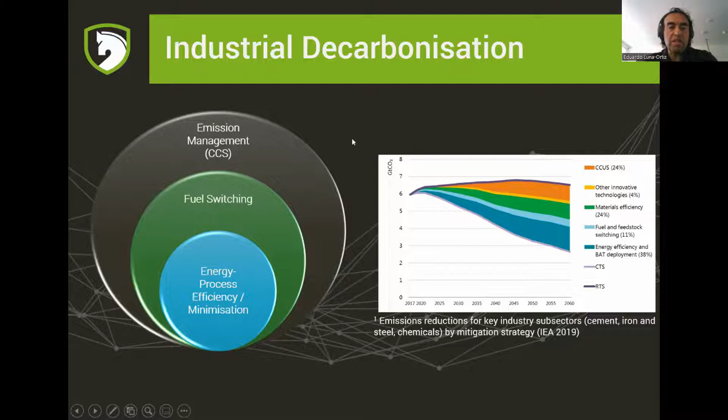However, decarbonization means different things for different people. How do we measure decarbonization? For example, we can measure it with CO2 release versus resource uses, the temperature increase of the planet. We can measure it in the effects of climate, climate change, the availability of resources, the uses and needs of products. We can also measure it with the 17 Sustainable Development Goals of the United Nations.

And how do we measure? How do we decarbonize? So one way is to reduce CO2 emission by reducing energy demand. One way, which is part of the talk this afternoon, is to utilize the captured CO2, or generate only the amount of CO2 that can be captured and utilized, and that's process efficiency. We can look for integrated solutions taking into account regional constraints.

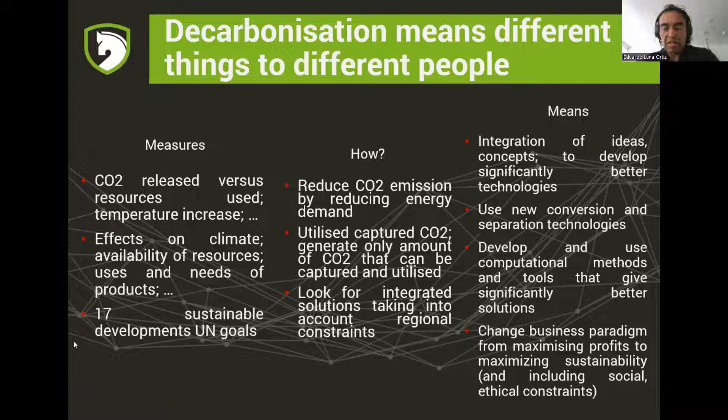How can we do it? Or what are the means to decarbonize? We can integrate ideas or new concepts to develop significantly better technologies. We can use new conversion and separation technologies. We can develop and use computational methods and tools that give significantly better solutions. And perhaps a bit more controversial, we can change the business paradigm from maximizing profits to maximizing sustainability, including social and ethical constraints.

When we talk about energy transition, one question is why we not only change to renewables, or why we not only use renewables. The current deployment rate is not enough without significant deindustrialization, and it will require a lot of investment and perhaps even political willingness. In reality, we will still depend on hydrocarbons, but we have to make sure that we minimize the emissions of those hydrocarbons. Moreover, renewables cannot prevent emissions of hard-to-abate industries like steel or cement.

CCS is probably going to be one of the pillars in the energy transition. It's not the silver bullet, it's not the only thing that we can do. But by doing this, we have to make sure that we do not prevent the increasing efforts through green energy.

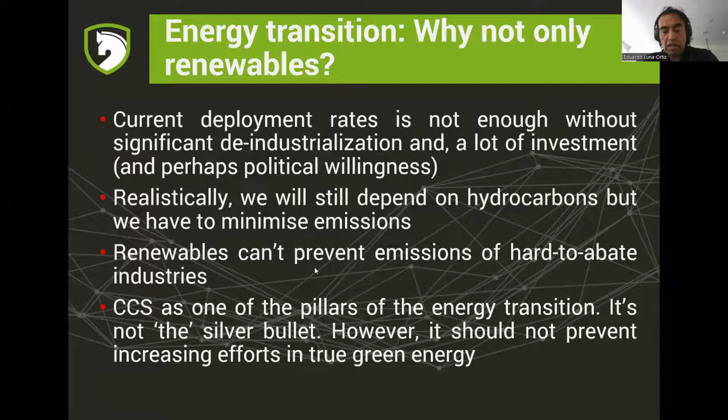I want to speak about CCS, but before that, I want to speak a bit about other types of opportunities to decarbonize or reduce CO2 emissions. One is energy efficiency in operations. For example, we know that distillation columns are very energy intensive, and that means emissions.

The long-term solution will be a total replacement of these columns. The question is if there are membranes or related materials to totally replace these industrial columns, and the answer is we're not quite there yet. The short-term solution is to use a hybrid, integrated scheme: integrate existing columns with small membrane operations, which will reduce consumption. However, this needs optimal design to combine both unit operations so that each one operates at the highest efficiency. By doing this, we can maybe save between 10 to 50% of energy, and therefore reduce emissions.

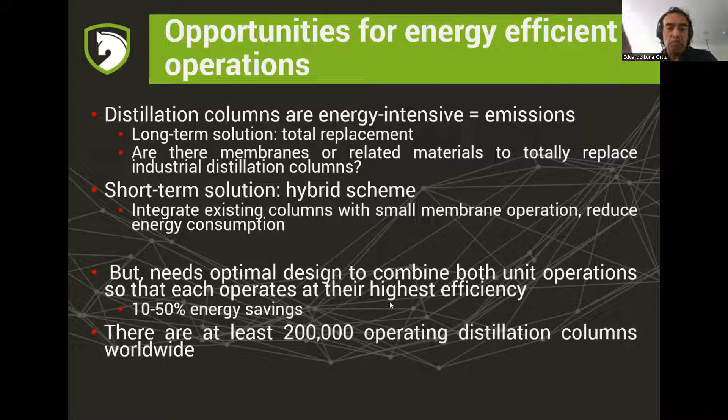This is actually a lot of opportunity. We can minimize a lot of CO2 emissions because, for example, just for distillation columns, there are about 200,000 operating distillation columns. So that will be quite a lot of energy savings. By doing these little savings on efficiency, before we start talking about CCS, I think there's potential to minimize those emissions.

But now I'm going to talk about CCS, which is the topic of this Lunch and Learn. We are going to be talking about the industrial CCS cluster. So we have a number of emitters, which will be an industrial source like a fertilizer or cement plant. We're going to have maybe power, biomass, direct air capture, or blue hydrogen. All these industries, we're going to capture the CO2 and put it into a gathering network.

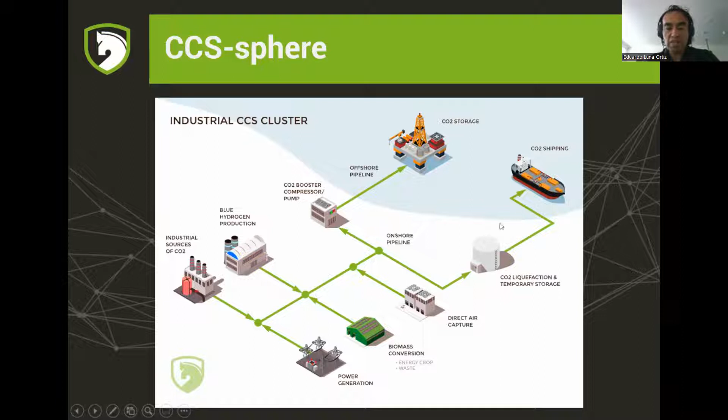Then we're going to transport this CO2 into perhaps offshore CO2 storage, and that's going to be permanent. This is not EOR, that's a different story. We're going to be just talking about permanent CO2, so that CO2 is not being used to produce more oil. We can also perhaps ship that CO2 to other clusters, for example. So this is what we know as an industrial CCS cluster. But this brings challenges, because we're going to have multiple users, meaning different current industries, but maybe in the future, new users are going to tie into the network.

These users are going to be very different. They're going to be different sizes. We're going to have very big emitters or small emitters, different industries, as I said, from cement, power, steel. And each one may use a different capture technology with different solvents or different dehydration technology, etc.

The fluid, the CO2, is going to have transitions, perhaps, and by that I mean it's going to transition from gas to liquid or supercritical, and that could happen in the reservoir, perhaps, and I'm sure Anzhela is going to talk about it. But for sure, it might happen also in the network, and that's something we need to manage somehow.

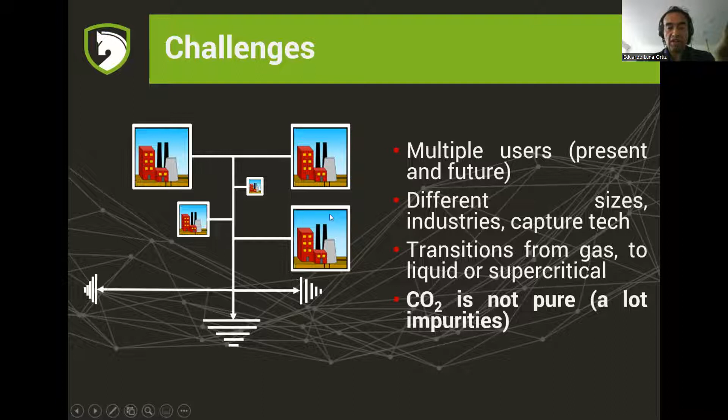More importantly, the CO2 is never going to be pure, and we're going to have a lot of impurities. And that is very important. So that's when the PVT or the thermodynamics is important. You need to know your fluid, because it's not going to be 100% CO2. It's going to be a lot of stuff, like the species that I'm putting here.

We're going to have gases or light gases like hydrogen, nitrogen, argon, CO, which are mainly from combustion of fuels. We're going to have maybe lighter hydrocarbons, water, oxygen, NOx, SOx, and other stuff. We're going to have inclusive solid particles, glycols, nitrosamines or nitramines, which are the degradation products of the amines.

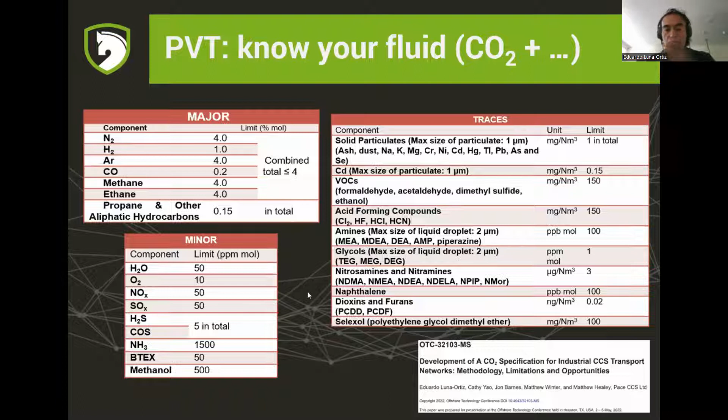The impurities, from a thermodynamic point of view, cause a lot of challenges. For example, different amounts of water may have different dew points. For example, 50 ppm of water, you're going to have a dew point of -30. With 2,000 ppm of water, your dew point is going to increase to, I don't know, 35 centigrade.

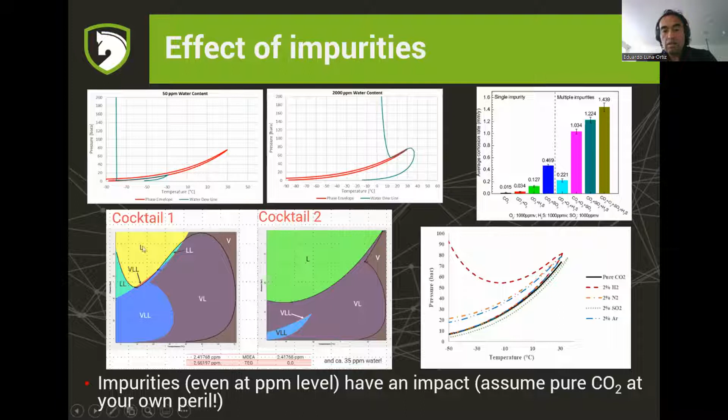But also, with the amount of impurities or the different impurities, we may even have chemical reactions, and not only reactions that may cause, for example, production of sulfuric acid, which is not a good thing to have in the pipeline.

But we may also have stuff, for example, CO2 and ammonia, and that's going to produce salts, ammonium salts. And we don't know if actually—well, we think that obviously it's not a good thing to have salts in the pipeline, because they might accumulate, I don't know, in valves or things like that, or if they're in transport, they might also get into the pores of the reservoir, and it might reduce injectivity.

So the fluid, as you can see, I hope you can see that it's very complex, and you may have a lot of different phenomena occurring. So it's very important that we start investigating this type of behavior, the interactions that happen between the CO2 and impurities, and between the impurities themselves.

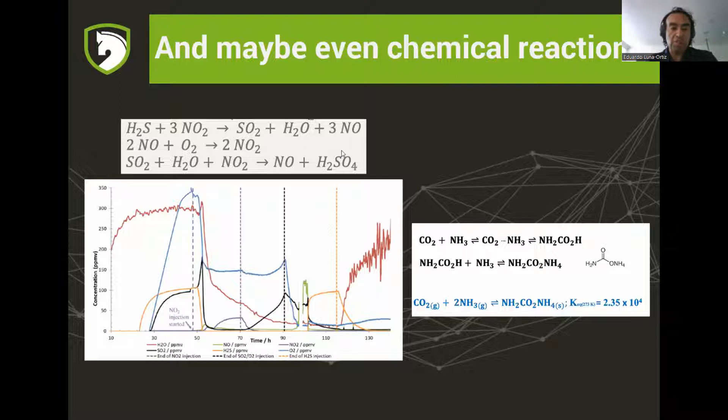One of the questions that is asked very often is, what is the best equation of state for thermodynamics? The truth is that there is none. It depends on the chemical nature of the compounds, how the model and results are going to be used, and of course where it's implemented. If you're writing your own software, you can use a particular equation of state you like. But if you're using HYSYS or Aspen, which have a particular set of equations of state, you have to make sure that whatever you use is good.

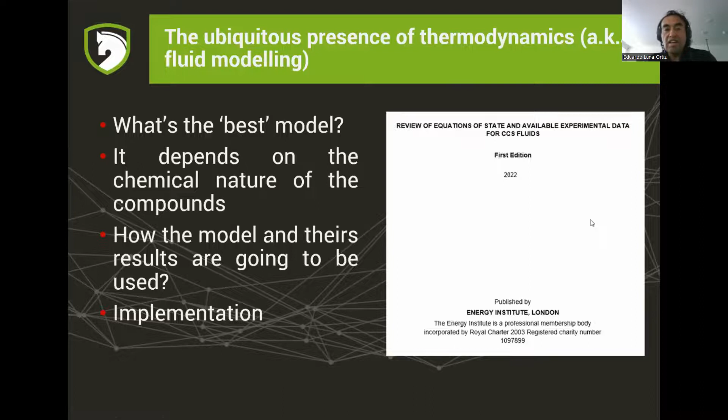I'm part of a working group of the Energy Institute, and we will issue a report, probably around October this year. This report will review equations of state and the experimental data available for CCS fluids. The main conclusion is that there's not a single equation of state that works for CCS fluids, so it depends on what you use.

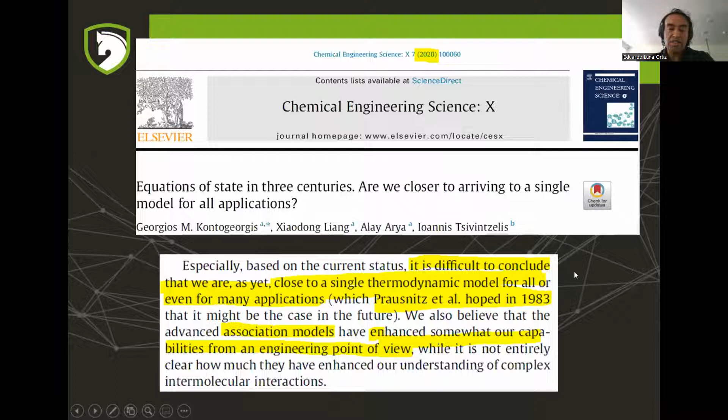I like this slide, because after several, we've had equations of state for more than three centuries, and we still don't have a universal single thermodynamic model that can be used for any application. I want to emphasize that we cannot keep asking what is the best model. You need to investigate your application, and based on that, select the correct or best equation of state for that particular application within CCS fluids.

However, any model we want to use is going to have limitations. For example, it might fail near the critical region, might not have very good liquid density predictions, might be very computationally expensive so you can't use it for reservoir simulation, or it might not be compatible with whatever simulator you're using.

All models should be tuned with experimental data. However, as you may know, data—at least for multi-component mixtures like the one I showed a few slides earlier—is non-existent. Even for binary mixtures, for example CO2 and hydrogen, or CO2 with other components, data is also very scarce. But there is some information, and if you have it, try to tune your equation of state to that experimental data, because as shown in this figure, it really improves your thermodynamic calculations.

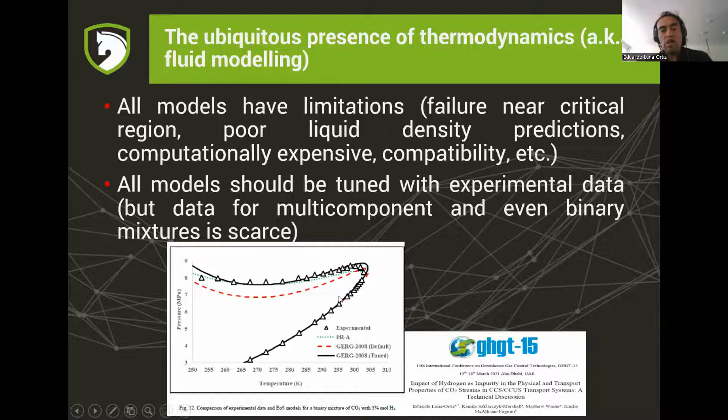Also important is the consistency of the equation of state through the whole chain of the CCS system. What we don't want is a plant that captures and compresses a certain amount of CO2, then the pipeline transports a different amount, and the reservoir stores a completely different amount. So it's very important that we keep thermodynamic consistency through the different parts of the CCS system.

Sometimes we segregate the subsurface and the surface and don't communicate between them, as probably also happens in conventional hydrocarbons. But particularly in CCS or CO2 transport networks this is more critical, because it really leads to big discrepancies. This is mainly because CO2 properties change quite significantly with small changes in temperature and pressure, particularly when we operate very close to the critical region. So if we don't have a consistent or integrated model for the network, we're going to have a lot of discrepancies. You can have a look at a paper from some guys at Petronas describing one study case—it's very interesting.

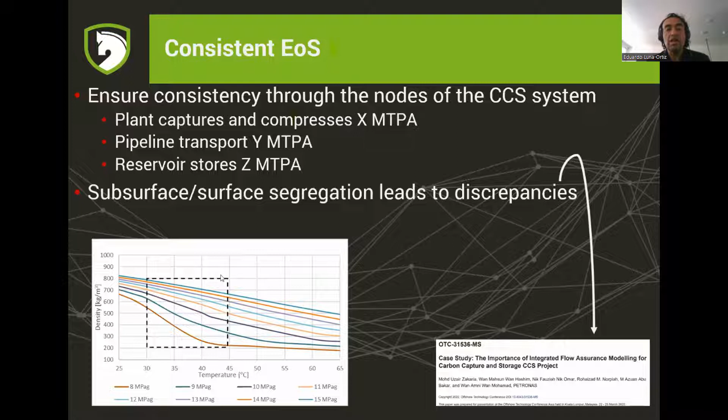One of the options we can do is integrated modeling to ensure thermodynamic consistency. There are various ways. One way is to use something called Cape Open. Cape Open is, I want to call it, some sort of software communication.

It allows a thermodynamic model to be used in a plug and play way across various simulators. For example, a thermodynamic model developed in Multiflash, which is a thermodynamic package, can be used in a process simulator like HYSYS using the same Multiflash models. So in a way, it would call Multiflash, and that makes sure you always use the same consistent thermodynamic model.

This Cape Open socket allows the thermodynamic model to be used in plug and play fashion in various process simulators. The problem is that not all simulation tools are Cape Open compliant. For example, if you do flash runs, Olga is not Cape Open.

Another option is to use a software called Maximus, which is an integrated production modeling tool. It's for people who do flow assurance and process facilities, something we use to do life of field simulation for oil and gas systems. This is a third-party simulator, and it can be used with Multiflash, which is from KBC.

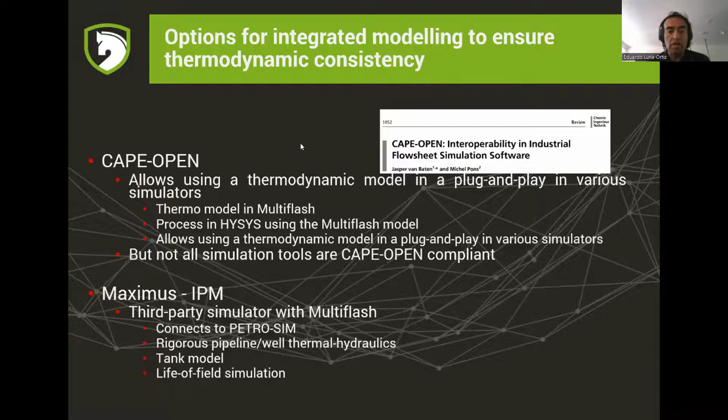A third option, something we do in PACE, is what we call a digital CCS simulator. We want to understand how quickly a CCS network will operate across the project cycle. As I showed at the beginning, we could have multiple emitters connected to the transport network, and it can also be connected to multiple wells and reservoirs.

Because we have multiple reservoirs and emitters, the conditions change over the field life. The reservoir pressure increases as you store more CO2. The flow rate changes, as I said at the beginning. We have different emitters tying into the network, and everyone is going to have different flow rates and probably different compositions, but within the same overall specification. We can also see phased development, so you can have staged compressors at different points in time.

It's also important that we have this type of model because there is limited, or actually no, operational experience with an industrial CCS network that has so many emitters connected into the same system.

We developed this as a custom-made web-based software, and it uses a thermodynamic model of choice. We can use it via lookup tables, or perhaps a machine learning surrogate model.

It also allows us, which the other two approaches don't, to use some sort of transient thermodynamic model for single phase elements. When I say transient, it's not necessarily years, I'm talking about short-term scenarios like a shutdown or a startup, things like that.

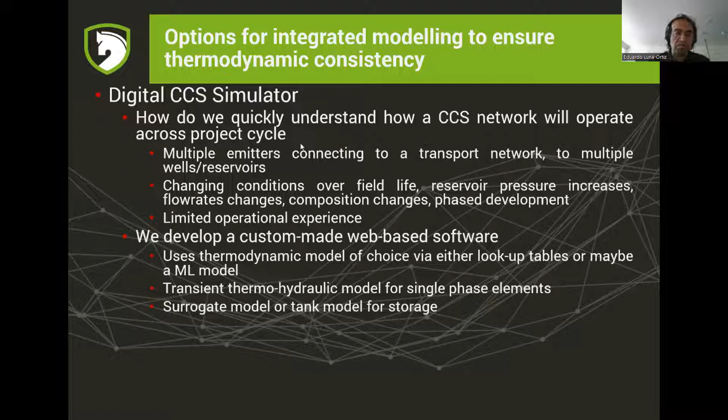We can also have a simplified model of the reservoir. There's a surrogate model or a tank model for the storage. And we have used this for one of the projects, for example.

Here we were investigating a system which in this case had just one source, one emitter, and we wanted to investigate how the flow splits to three different reservoirs. These three reservoirs, at a specific point in time, have different reservoir pressures, and we wanted to investigate how the flow splits in an uncontrolled offshore manifold, a natural split just by hydraulics.

This includes integrating the flow assurance, so the thermal hydraulic and thermodynamic model, along with well and reservoir models. We can build this without any third-party software. The well and reservoir model uses a surrogate model to match OLGA and ECLIPSE results, and this gives us good results. Unfortunately, I can only speak about what it is because I'm not allowed to show the results of this one.

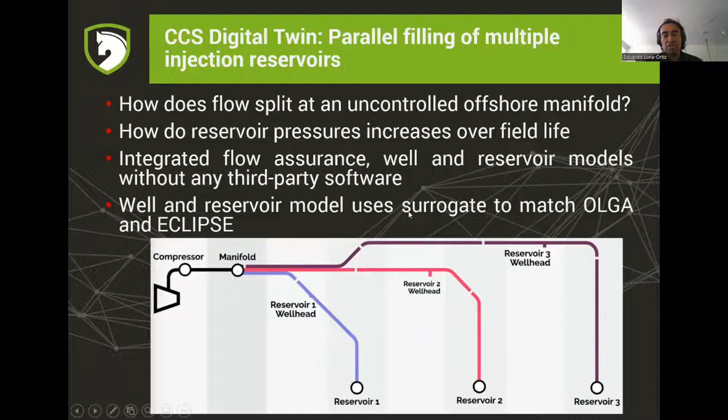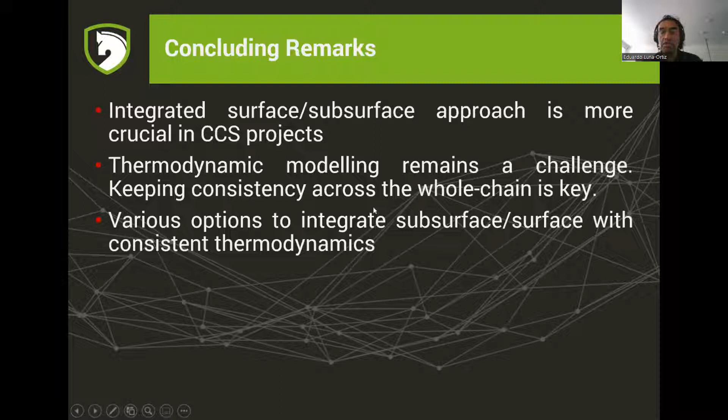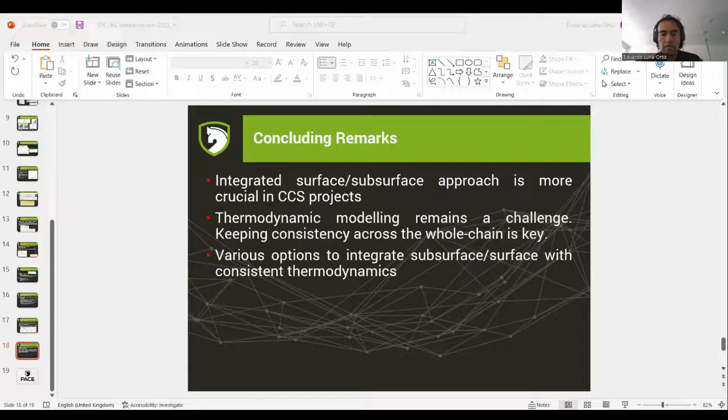Thank you very much, Eduardo, for the presentation. Just a quick note for everyone, we'll do questions at the end. But Eduardo, I think we need to sit down and have a chat because we do a lot of reservoir modeling, and we've investigated what effect impurities have on injectivity modeling and plume development. There's a significant difference, which can be increasingly important for well design or limitations of your acreage. Yeah, it's hugely important, and thank you very much for your presentation, really appreciate you giving us your time today.

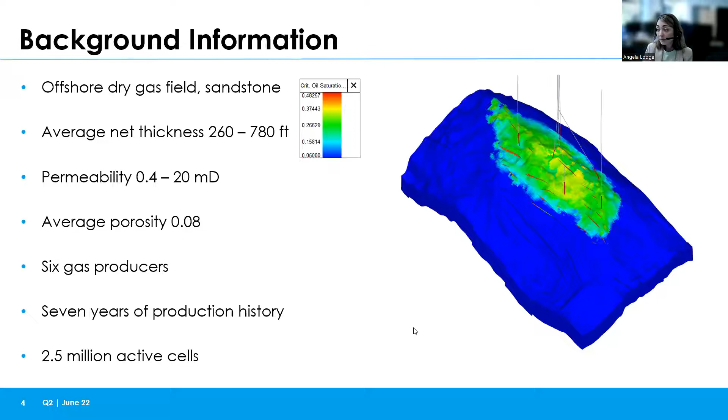When we decided to look at CCS screening for this field, we split the project into two phases. Phase 1 concentrated more on the injectivity of the wells—if they can actually be used for CO2 injection, what pressure regimes we'd expect at the COP in the reservoir and within the wellbore, and also evaluating the theoretical storage capacity. But theoretical storage capacity should really be treated as a maximum because there are a number of factors it doesn't account for, such as pressure constraints or injection strategy—what wells are injecting. In this case, injectivity is quite variable between different wells throughout the field.

The theoretical capacity also doesn't account for heterogeneities. Hence, we decided to take it further to the second phase of the screening, into the full field simulation model, to see if we can do it with tNavigator as well.

The key questions during the screening process were whether the subsurface environment is actually suitable for CO2 injection, whether the storage site can be developed cost effectively, and what the maturation potential and commerciality of the project are. I won't talk about all of those, but I will concentrate a little on capacity and injectivity.

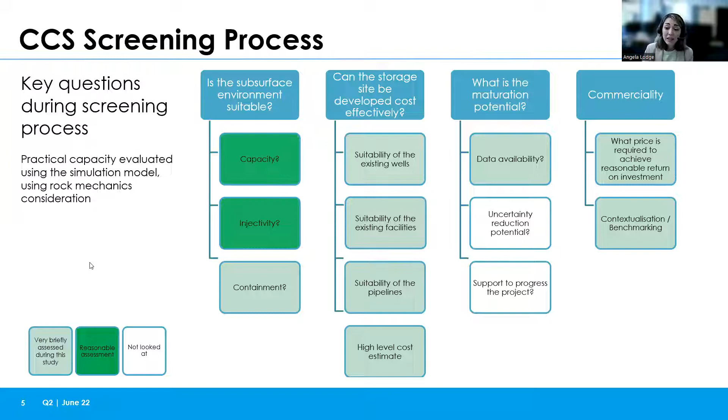The practical capacity was evaluated using the simulation model in tNavigator, and we looked at the geomechanics, so rock mechanics were introduced in the study. We developed a workflow to look at the CO2 injection.

As I mentioned earlier, we have dry gas. The initial model was, of course, the black oil model developed for gas production, including the gas history and the forecast. So in order to make it suitable for CO2 injection, we needed to convert it to the compositional model. We built an equation of state for the native gas and for the injected CO2.

We needed to make sure the two models, the black oil and the compositional model, were consistent. We also ran sensitivities on the number of components, because we have injection, we have the production history, we have the production forecast, and we also have the injection history. So the running time is quite important here.

Then we wanted to convert the black oil model into the compositional model, building the new saturation modeling and implementing the developed equation of state. We needed to make sure there is consistency between the two models, that our volumes are consistent and that our pressures are consistent as well.

Once we were happy with the compositional modeling, we could build on the prediction cases. We could convert the producers into CO2 injectors and build the injection scenarios, looking at the different wells and running sensitivities on the injection rates as well.

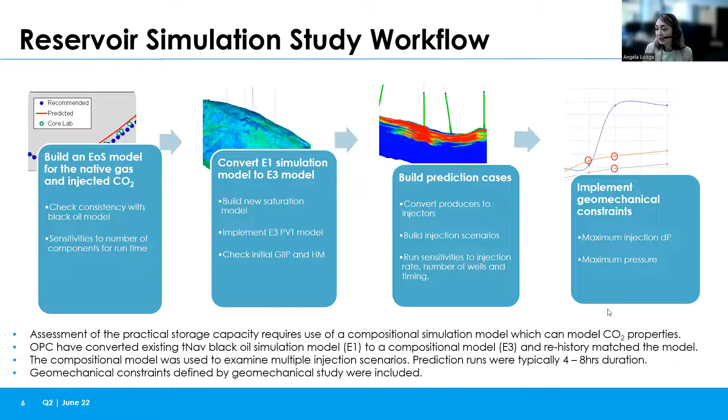To talk a little about the phase diagram of CO2, it's compressed and transported in a liquid or dense phase, and we want to maintain this dense phase all the way throughout the system, from the wellhead to the reservoir. We also want to make sure there isn't any free water present at all times, because that can increase corrosion rates by quite a magnitude.

If you look at the phase diagram, we have pressure and temperature. For pure CO2, we don't have a two-phase region, but as Eduardo showed earlier, with increasing impurities we get a widening of the two-phase region. This is the critical point for pure CO2.

The critical point is 31 degrees Celsius and around 74 bar. At the highest pressure, CO2 is in a liquid phase. Everything below the critical pressure is in a gas phase, and at higher pressure and temperature it's in a supercritical phase. Supercritical means its density is similar to a liquid and its viscosity is similar to a gas, so it weighs like a liquid but flows like a gas.

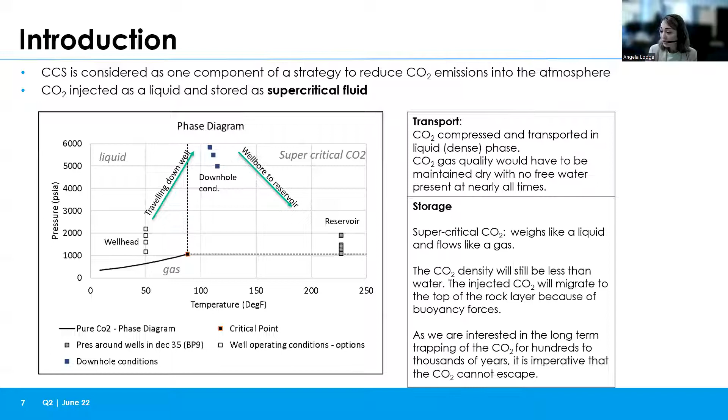So for this particular field, the initial reservoir pressure is around 400 bar. The depleted reservoir pressure is somewhere from 75 to 132 bar, which is quite close, quite similar to the critical point, however above the critical pressure, giving us quite favorable conditions in that sense. But also that means we have around 326 bar pressure that we can repressurize the reservoir to.

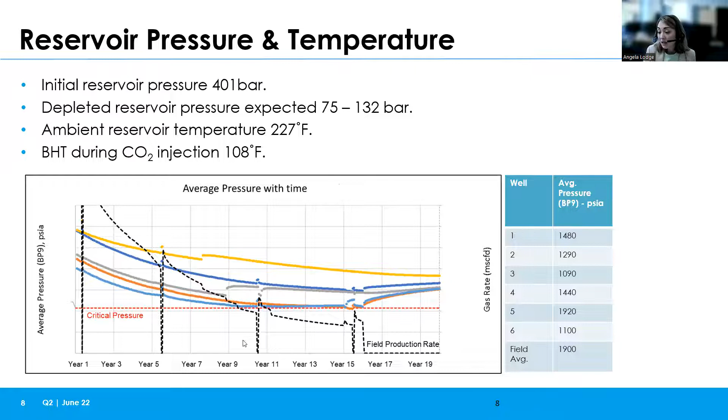The ambient reservoir temperature is around 227 Fahrenheit, and bottom hole tubing temperature during injection is around 108 Fahrenheit. So again, once at the end, at the COP of the reservoir, in this particular case, we are close to, but just slightly above the critical pressure.

So in order to convert the black oil model into a compositional model, we needed to look at some assumptions and introduce some modifications to the modeling. As a given, we have a dry gas field, and a black oil simulation model that is history matched and forecasted. So we needed to look at the equation of state and make sure that it's consistent.

We ran sensitivities on the number of components, and we initialized the runs with the water saturation grid of the black oil models. So we had consistency in the in-place volumes, and we rebuilt the saturation tables in order to be suitable for CO2 injection and compositional modeling as well.

We needed to make sure that the history match is maintained, meaning that we have the same volume in place initially, and also the same volumes at the COP. So essentially, between our base case assumptions in the black oil model and the compositional model, we have the same voidage space available, and the pressure regime is maintained as well.

So for this screening study, we used 100% CO2, but as Eduardo already highlighted, it is indeed very important to introduce the impurities. This is the screening project, and in the future we will potentially introduce impurities, because of course it's going to affect your plume development. Of course, it's going to affect your flow assurance as well.

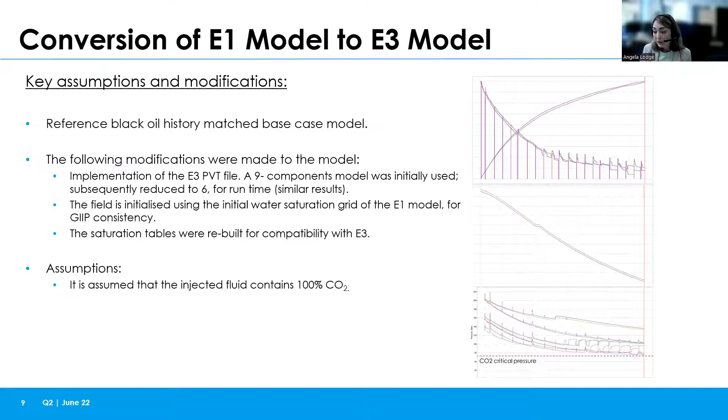So once we were happy with the model, with the history match, and with the forecast, we could start building up the prediction for the CO2 injection scenarios. We needed to make sure that the start date is the same, so we are at the same pressure for all the cases consistently. We controlled the injection by a constant rate to maintain the plateau rate, assuming a stable, steady supply of CO2 throughout the years.

We have some pressure constraints that we needed to introduce, from the facilities point of view, but also from the reservoir point of view. It is more relevant at the later stage of the simulation. So of course, at the initial level of injecting into a depleted reservoir, we're at a quite low pressure, but as we start injecting, the pressure is going to gradually build up.

And then we need to make sure we look at the pressure constraint as well, that we understand from geomechanics what is the maximum dP we can introduce in the reservoir, and what is the maximum pressure we can repressurize the reservoir to. So in order to investigate individual wells injectivity and field suitability to store CO2, and to look at plume development, any constraints to flow, and the effective storage capacity of the field, we convert the black oil into compositional modeling, and also convert producers into injectors, then start building up on the injection scenario.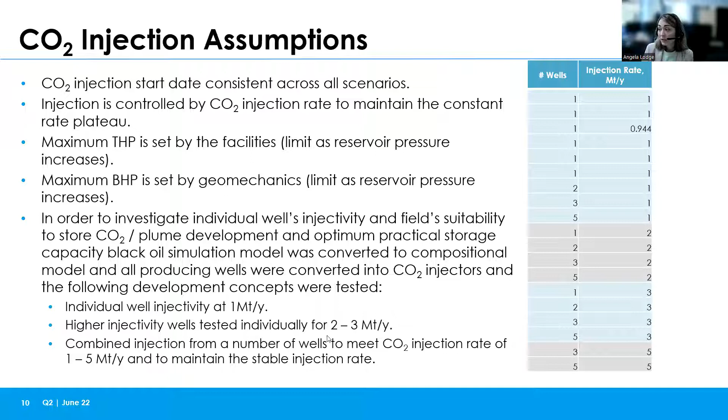Looking at the plume development for this particular scenario, it's a cross section. These three plots on the right show a cross section between these two wells, with injection from the three wells here.

We are looking here at the CO2 mole fraction. Pre-injection, there is not much CO2. As we start injecting, we can see the CO2 gradually propagating throughout the reservoir, but also on the other side where there is no injection, we can still see CO2 propagating. So again, there is heterogeneity in the field and some faults, but we could see there is no significant plume restriction in this particular case.

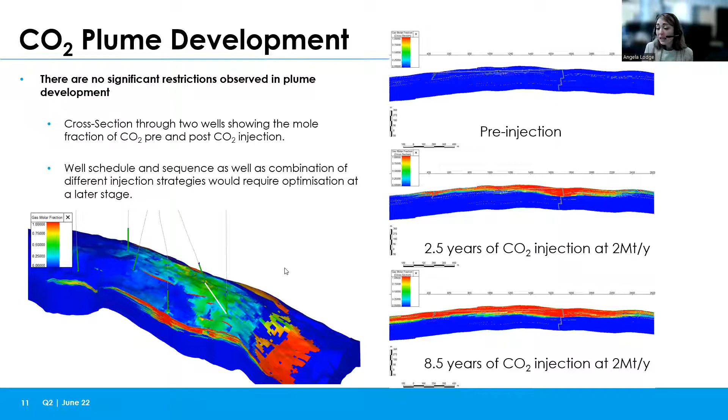If we look at the pressure map as well, this is a slightly different cross section - same case, but going all the way across the field. Pre-injection, we have quite a high level of depletion throughout the field because the wells were producing. But once we start injecting, we can gradually see the pressure building up around the injection wells, and over time, the pressure building up all the way across the field.

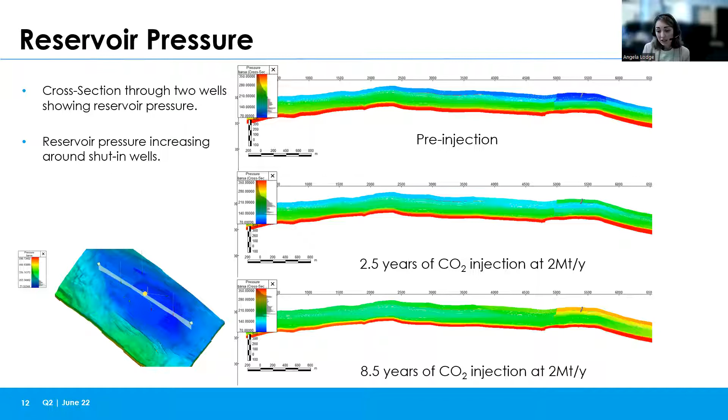This can be a double-edged sword: on one side it's our capacity, our storativity, but on the other side, if we have a low supply of CO2 but some wells have too high injectivity for this particular rate, we could start injecting with weaker wells, building up the pressure, and then introduce the other wells. Again, this ties together with the injection strategy we need to look at.

To conclude, we looked at the pressure regimes within the reservoir and the wellbore as well. At this particular stage, it is pure CO2, which can be taken further to look at impurities, important because it affects your two-phase region and critical point as well. But as a screening study, that's what we used.

We found that the field is potentially suitable for CO2 injection. The reservoir pressure is quite favorable as well, as we are above the critical point, giving us an opportunity during normal operating conditions to avoid the phase changes.

We were also able to evaluate the effective or practical storage capacity of the field. We looked at the geomechanics, and the cap rock in this particular case is very strong - we can repressurize the reservoir up to initial levels.

As we inject, we would of course introduce potentially some small fractures or reopen existing ones, but by no means with the delta pressure we consider is it going to compromise the seal or affect the faults.

So the reservoir modeling work showed that we have no significant restrictions to plume development. Even though there is heterogeneity, and even though there are some faults in the field, we could see the CO2 is capable of propagating through the reservoir.

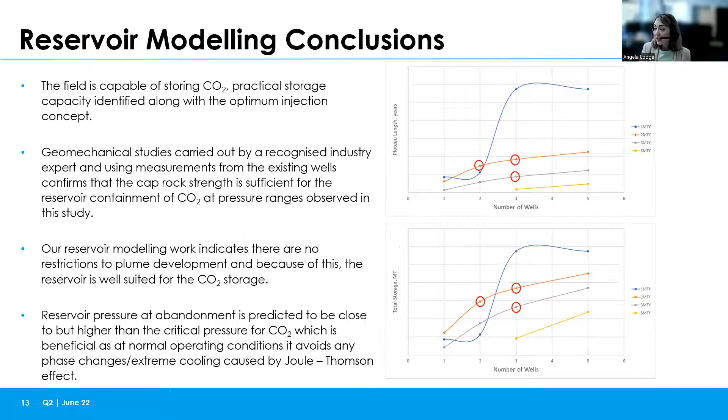Thank you very much, Angela. That was really interesting - I've actually seen that presentation before, but it's much easier when you see it on the screen. So we've got quite a few questions. I think I'll start, and I think Barney's going to join me by asking some of them, but Vincent originally asked just at the beginning there, what was the pressure at the start of injection?

I think we saw that in one of the slides - it's around about 75 to 100 bars, 75 bars and above, yeah.

And they said, if very low pressure, was there constraints due to the Joule-Thomson cooling effect? I think we addressed that - yes, we just about avoid that, we just about, yes, indeed.

And again, there are different possibilities, different options to look at it, depending on where your economic COP is - can you stop production earlier, which probably from a gas production perspective isn't ideal, but you need to look at what your pressure regime is. And again, it's one case, one scenario, so you would have some uncertainty in the reservoir pressure, especially at the end of COP, given a number of years ahead.

Barney, before you jump in, I'm just going to address Adrian's question. It says, when using subsea wells, not platform-based, downhole chokes are required in the injectors. How does this affect the modelling, and how demonstrated are downhole chokes for CCUS today? I think you'd be able to comment on how it affects modelling, but I'm not sure about how demonstrated the chokes are.